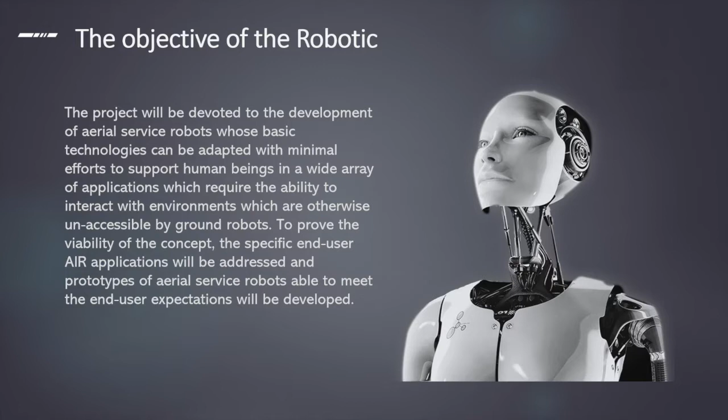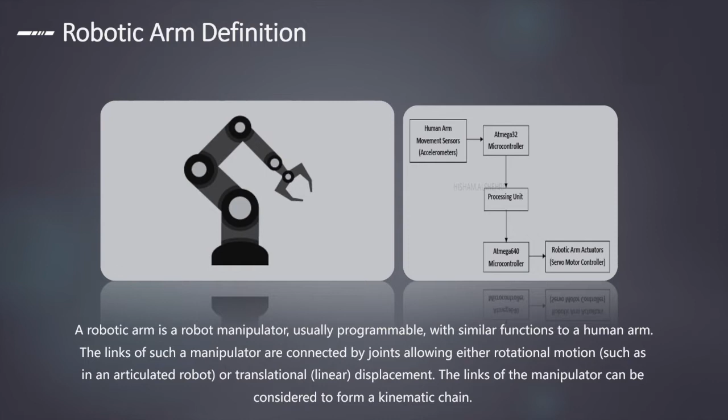Idea of the project. The idea for this ARM project was extracted from the massive losses that can be avoided with artificial intelligence interactions, like for example opening or closing valves located in critical locations not accessible and not designed for human occupancy, combined with gas detection. Whenever there is a gas leak, the robotic arm will immediately take action to close the valve.

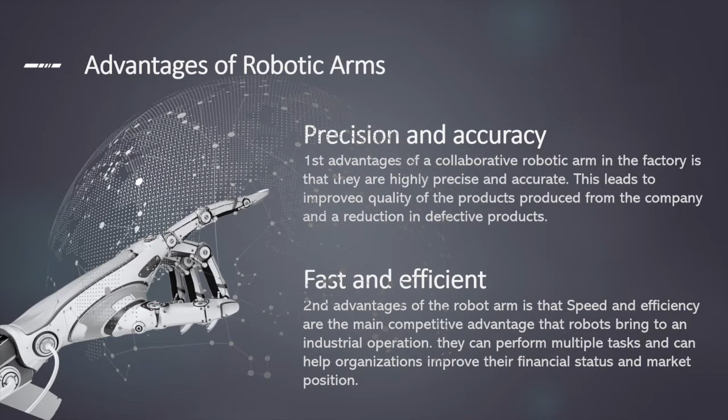Advantages of robotic arms. First, precision and accuracy. A collaborative robotic arm in the factory is highly precise and accurate, leading to improved quality of products and a reduction in defective products. Second, fast and efficient. Speed and efficiency are the main competitive advantage that robots bring to an industrial operation. They can perform multiple tasks and help organizations improve their financial status and market position.

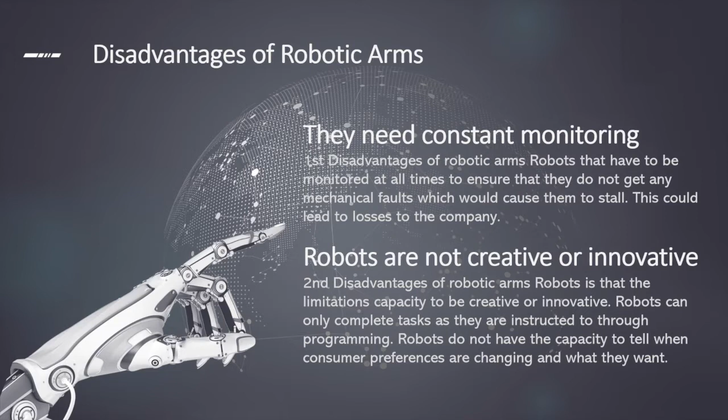Difficulties and challenges in implementing the idea. Shipment delayed from Amazon. Due to the health conditions in China and the spread of coronavirus, the time limit for the arrival of the arm changed, resulting in delays in installing the arm. But with high enthusiasm and challenge, the arm was installed and connected with less than 5 hours of continuous work.

Coronavirus COVID-19. Due to the current events of the coronavirus COVID-19, we were unable to get the robot installed on time due to government requests to minimize gatherings in person. So we had one of us install it while the rest watched through a live feed.

Drop of current. We encountered a problem when operating all the motors at the same time — not all motors worked due to the drop of current. This problem was fixed by changing the code used in the project so there is a delay between each motor during operation.

Distance between housing. Because some people lived in Abqaiq and others lived in Al-Khobar, it was difficult to hold a meeting together during weekdays, limiting us to weekends. Then the decision to impose curfews and not leave homes came. This problem was solved through new means of communication like FaceTime or Skype, through which we had many meetings.

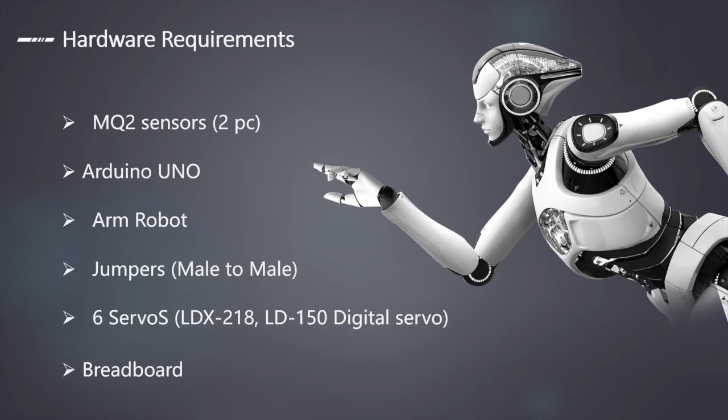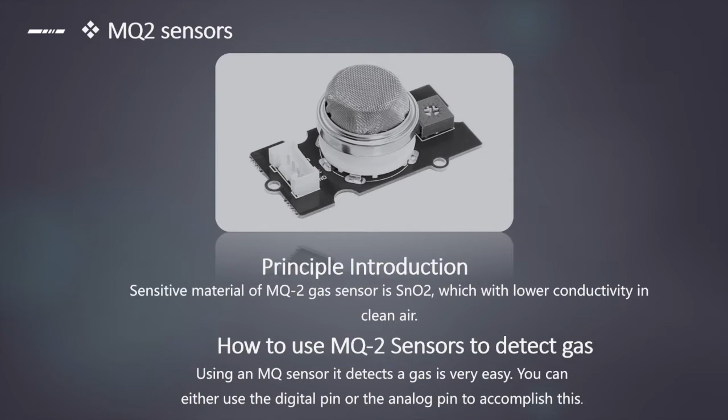How to use MQ2 sensors to detect gas. Using an MQ sensor to detect gas is very easy. You can either use the digital pin or the analog pin to accomplish this.

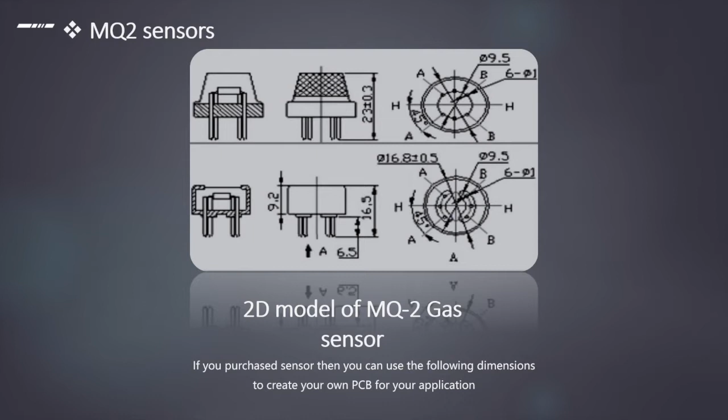MQ2 sensors: 2D model of the MQ2 gas sensor. If you purchased the sensor, you can use the following dimensions to create your own PCB for your application.

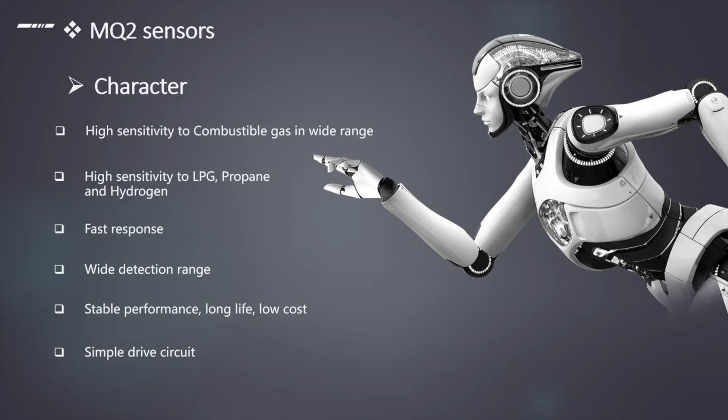MQ2 sensors characteristics: 1. High sensitivity to combustible gas in a wide range. 2. High sensitivity to LPG, propane and hydrogen. 3. Fast response. 4. Wide detection range. 5. Stable performance, long life, low cost. 6. Simple drive circuit.

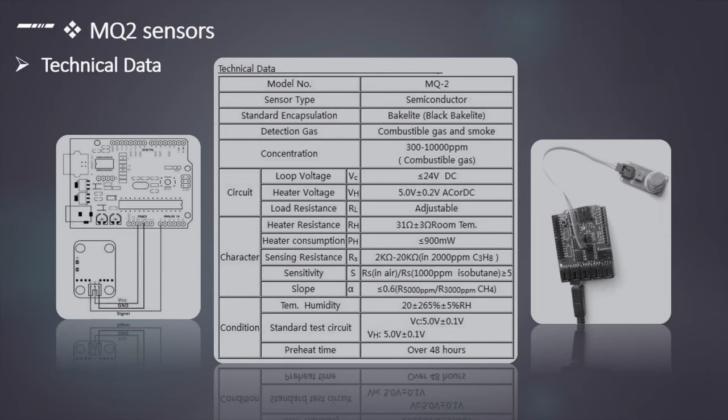MQ2 sensors technical data. In this slide, just an overview — we'll see how to connect the MQ2 with the Arduino and which pins to use, as shown in the photo describing the MQ2 model, type, standard, gas detection, and so on.

Arduino Uno is a microcontroller board based on the ATmega328P datasheet. Arduino Uno general pin functions: 1. LED — there is a built-in LED driven by a digital pin. 2. VIN — the input voltage to the Arduino.

5 volt pin outputs a regulated 5 volt supply from the regulator on the board. 3.3 volt pin outputs a regulated 3.3 volt supply generated by the onboard regulator. GND are ground pins. IOREF is a pin on the Arduino. Reset is typically used to add a reset button to shields that block the one on the board.

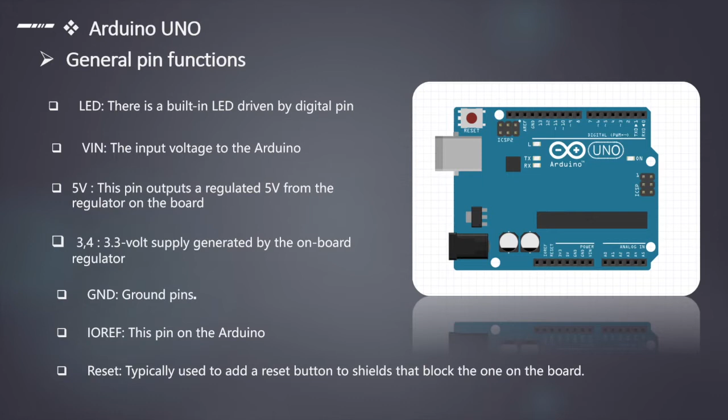What are robotic arms used for? Robotic arms of all kinds are used today at every scale of manufacturing, from minutely detailed circuit board assembly to large volume heavy industries such as automotive production lines, as well as in a huge range of pick-and-place conveyor belt applications. This means it is important to know which types of programmable robotic arms are better suited to which environments and tasks before planning a purchase.

These criteria will typically include: Load - all types of robotic arms have a given load capacity, including tools and attachments. Orientation - generally defined by the footprint and mounting position of the robotic arm. Speed - particularly important when choosing robotic arms for picking and placement applications.

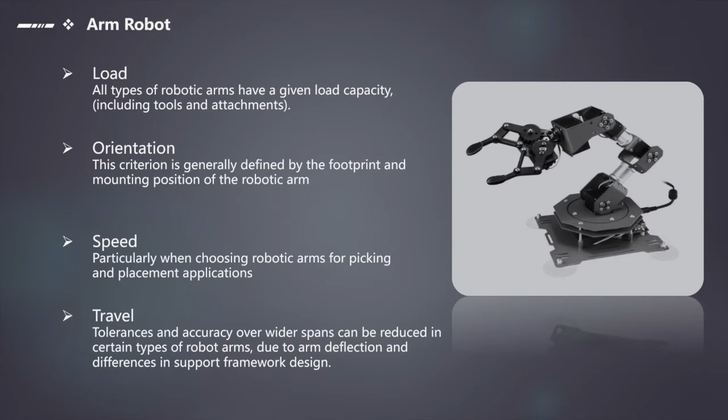Travel - tolerances and accuracy over wider spans can be reduced in certain types of robot arms, due to arm deflection and differences in support framework design. Precision - certain types of programmable robotic arms are inherently designed to be more precise in their range of movements and articulations than others.

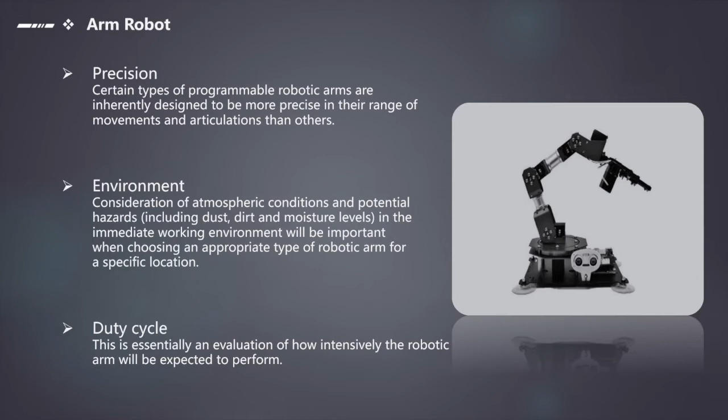Environment - consideration of atmospheric conditions and potential hazards, including dust, dirt and moisture levels in the immediate working environment, is important when choosing an appropriate type of robotic arm for a specific location. Duty cycle - essentially an evaluation of how intensively the robotic arm will be expected to perform.

Jumper wires, male to male. A jumper is an electrical wire, or group of them in a cable, with a connector or pin at each end. Jumper wires typically come in 3 versions: male to male, male to female, and female to female. Alligator clips, which consist of 2 spring metal clips connected by wire, are actually just fancy jumper wires.

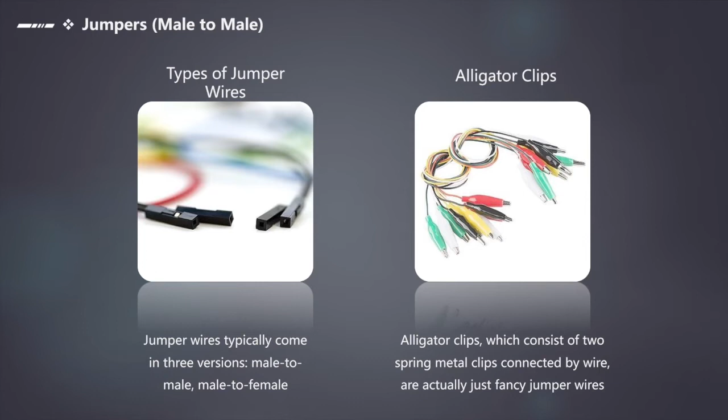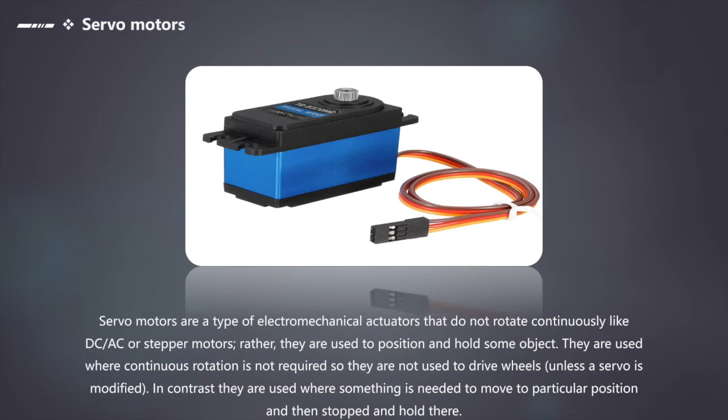Servo motors are a type of electromechanical actuator that do not rotate continuously like DC, AC or stepper motors. Rather, they are used to position and hold an object. They are used where continuous rotation is not required, so they are not used to drive wheels unless a servo is modified. Instead, they move to a particular position and then stop and hold there. How is the servo controlled?

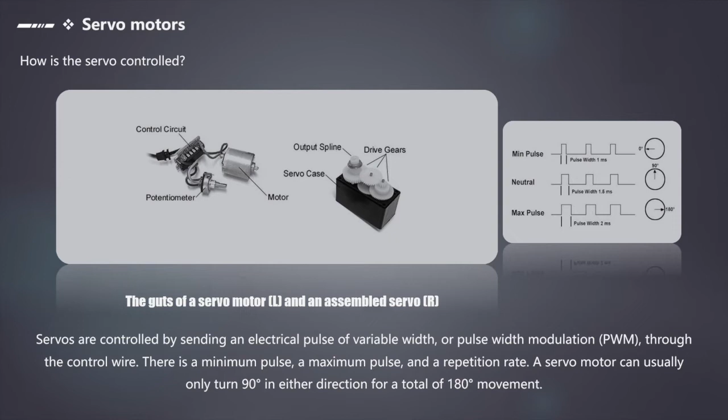Servos are controlled by sending an electrical pulse of variable width, or pulse width modulation (PWM), through the control wire. There is a minimum pulse, a maximum pulse, and a repetition rate. A servo motor can usually only turn 90 degrees in either direction, for a total of 180 degrees of movement.

There are 2 types of servo motors: AC and DC. AC servos can handle higher current surges and tend to be used in industrial machinery. DC servos are not designed for high current surges and are usually better suited for smaller applications.

Servos are used in radio-controlled airplanes to position control surfaces like elevators and rudders, in walking robots, or in operating grippers. Servo motors are small, have built-in control circuitry, and have good power for their size.

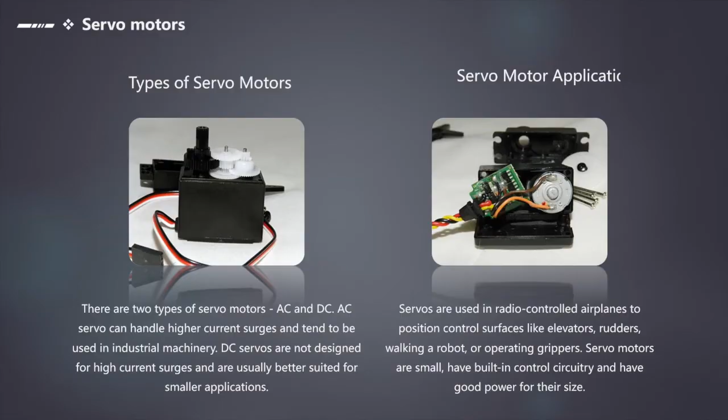Other examples and uses for robotic arms: in food services and pharmaceuticals, the tools are designed to be used in harsher environments where the potential for corrosion is high, due to being washed at high pressures and temperatures repeatedly to maintain strict hygiene standards. Servos are also used in inline manufacturing, where high repetition yet precise work is necessary.

Timeline: Week 4 - discuss with supervisor about the project. Week 5 - selected the team members and discussed the presentation topic. Week 6 - distributed responsibility among the team. Week 7 - identified and purchased the hardware components. Week 8 - received the hardware components and assembled the robotic arm.

Week 9 - developed the presentation of the project. Week 10 - identified the Arduino code. Week 11 - troubleshooting the robotic arm movement problems. Week 12 - tested the robotic arm. Week 13 - completed the presentation.

Conclusion: today we find most robots working for people in industries, factories, warehouses, and laboratories. Robots are useful in many ways. For instance, they boost the economy because businesses need to be efficient to keep up with industry competition. Having robots helps business owners be competitive, because robots can do jobs better and faster than humans. For example, a robot can build and assemble a car.

Yet robots cannot perform every job. Today robots' roles include assisting research and industry. Finally, as technology improves, there will be new ways to use robots, which will bring new hopes and new potentials. Here is an overview of the project.

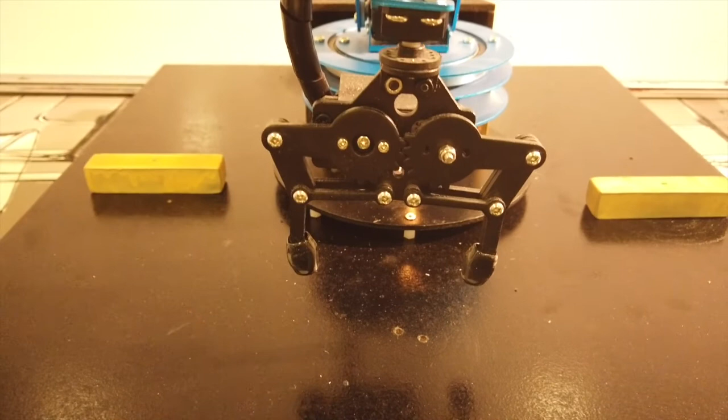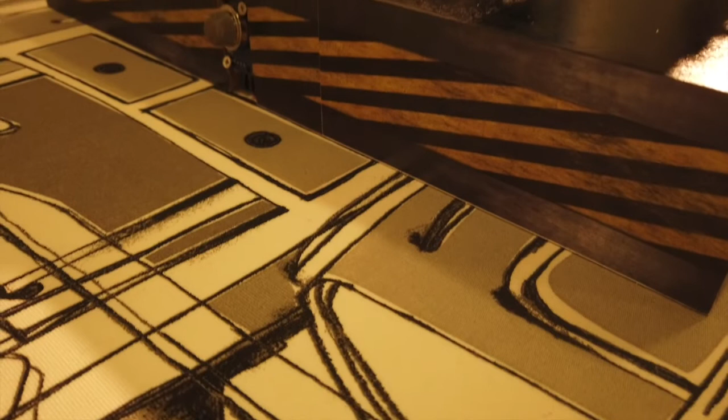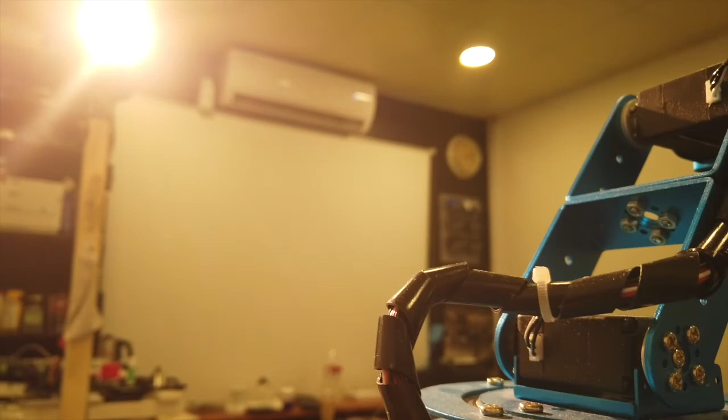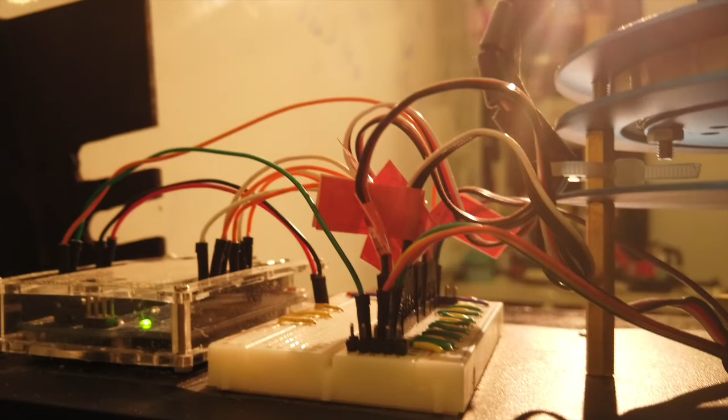As you see, we described the connections on the board, so it would help us if we lose any connection.

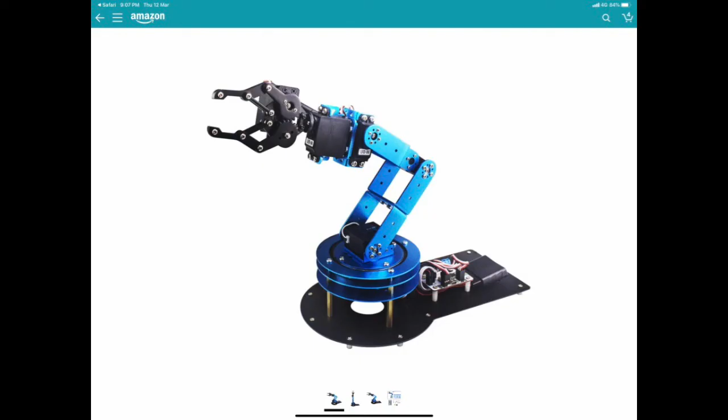In the end, we can only express our sincere thanks to Engineer Ibrahim for his help during the past period, and his method and way of helping us gradually operate the servos and arm until we got it working the ideal way. Thank God, thanks for watching.